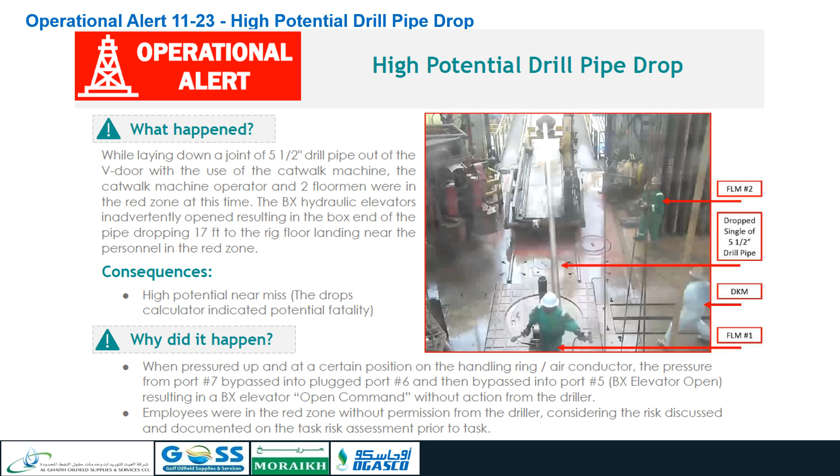Employees were in the red zone without permission from the driller, considering the risk discussed and documented on the task risk assessment prior to task. What should be done to prevent reoccurrence? Dedicated green zones must be clearly marked for employees to stand in while rig floor equipment is moving.

Red zone officer must be nominated daily on each crew to monitor personnel and stop them from entering the red zone without verbal confirmation from the driller. Personnel only allowed to enter the red zone after verbal confirmation from the driller or assistant driller, AD, and after

moving equipment stops. OIM/TPs shall instruct the expectations of employees on red zone, including the use of dedicated green areas, red zone officer, and only entering the red zone after verbal confirmation from driller or AD.

Areas where improvement is needed: workers must adhere to red zone standards and only enter the red zone when authorized to do so. Work supervisors must educate crews on red zone requirements and red zone officer, preventing any unauthorized access.

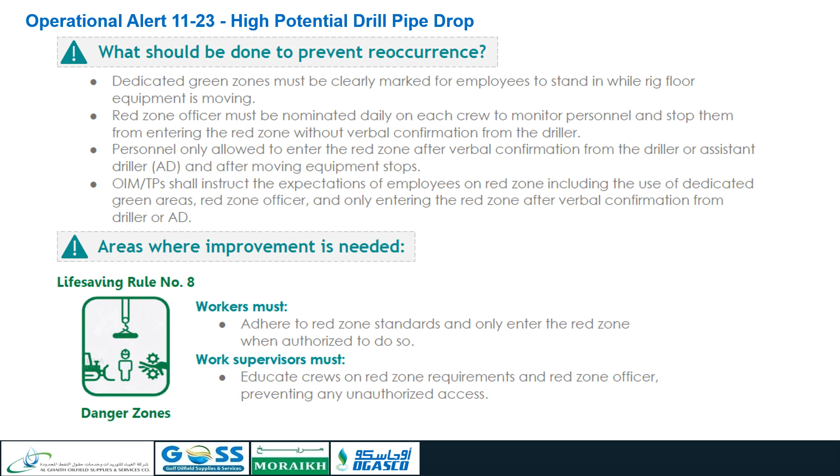Traveling block descended on Kelly during connection. Incident description: during run-in hole, RIH, with 6 drift BHA, while the crew picked up connecting the Kelly with drill string, suddenly, the traveling block descended about 2 feet and rested on the Kelly swivel. No damage and/or injuries reported due to this incident.

Initial findings: manual brake was not applied, not secured with chain, while torquing Kelly, and only the emergency brake was engaged. Air control valves for catheads activated and allowed the system pressure to lose, resulting in emergency brake failure. Simultaneous jobs were done on the rig floor without relevant work permit. No warning alarm system to alert the driller about low air pressure.

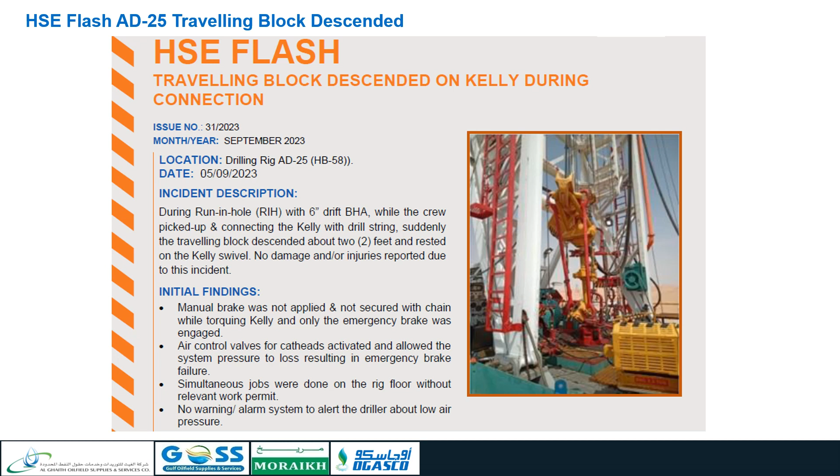Immediate actions recommendations: the activity was stopped and a safety stand-down was conducted with all staff at site to discuss this incident. It is recommended to: A. Always ensure manual brake is engaged and chained, instead of relying only on the emergency brake. B. Verify and ensure all the critical alarms are functioning properly. C. Conduct refresher awareness to the crew on the simultaneous operations.

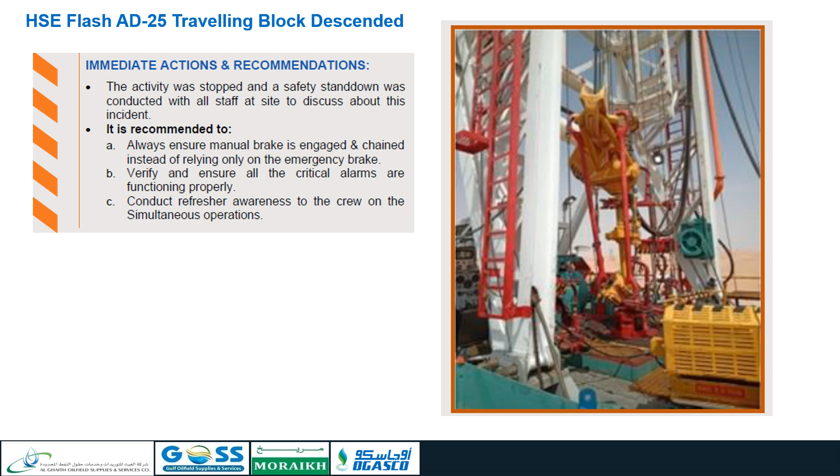High potential drill pipe drop. What happened? Description of event: after completing run-in hole, RIH, 3.5 completion tubing, 1 pup joint got damaged by the power tong. Decision was made to lay it down. The power tong operator, injured person, IP, subcontractor crew, parked the power tong offline and attempted to fix the stuck backup jaw while rig crew were laying down the damaged pup joint.

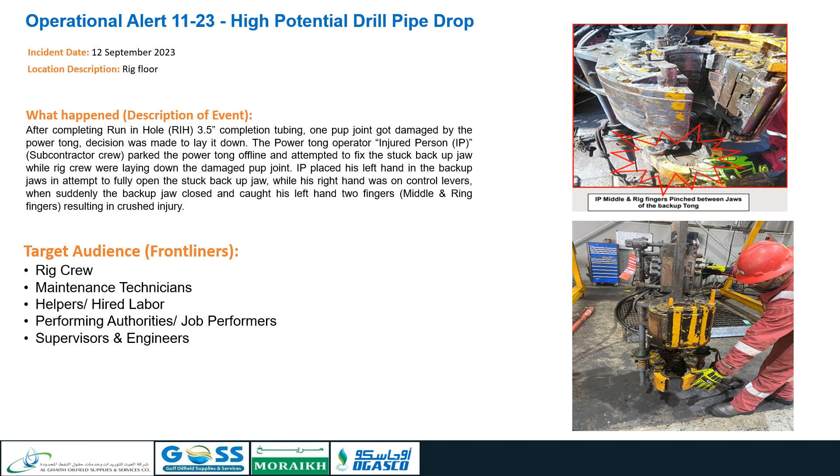IP placed his left hand in the backup jaws in attempt to fully open the stuck backup jaw, while his right hand was on control levers, when suddenly the backup jaw closed and caught his left hand 2 fingers, middle and ring fingers, resulting in crushed injury. Why has it happened?

Causes: the power tong was not isolated from the hydraulic energy before troubleshooting. No WMS was in place for changed scope for troubleshooting and repair of the power tong. JSA did not cover hazards and controls for tool malfunctioning. IP did not inform driller before doing troubleshooting job in the power tong. Power tong backup jaw malfunctioned and got stuck while running 3.5 completion tubing. IP did not inform or ask coworker for assistance.

Recommended actions: ensure that troubleshooting on the power tong, like change of dies, jaws, etc., should be done under energy isolation. Ensure that all the jobs including troubleshooting are carried out under WMS and JSA, with all relevant hazards and controls covered. Never initiate any task without permission or clearance from the area authority.

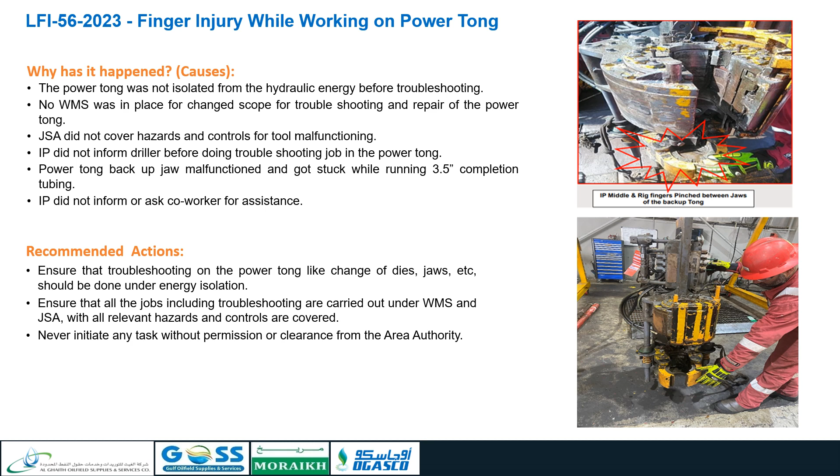Drop of CRT. What happened, description of event: while RIH 9 5/8 casing tubular, after running 112 joints and moving with the top drive system up to take the next joint, the casing running tool slipped/disconnected from the top drive system and fell down from a height of 35 feet, landing on top of the casing tubular joint box, causing damage to the casing tubular joint. No personal injury.

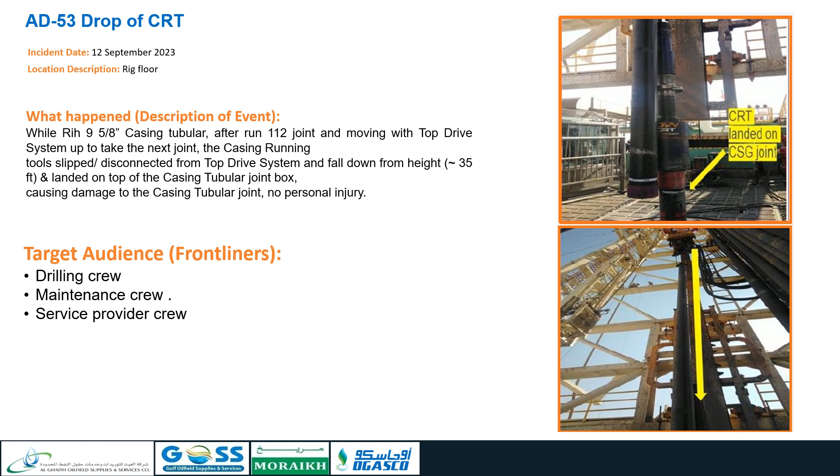Why has it happened? Causes: improper decision-making, lack of judgment, improper make-up torque between crossover and TDS saver sub. Defective tools, visual damage on the saver sub pin and crossover box. Inadequate development of PSP for the task. The minimum allowed torque of the connection was not mentioned in the task procedures.

Inadequate assessment of potential failure. The design of the CRT not having a mechanism or secondary retention to support in case of thread failure. Inadequate inspection, audit, monitoring: the saver sub or crossover was defective, and it was not inspected.

Recommended actions: always verify the connection between saver sub and crossover of the casing running tool during run-in-hole operation. Minimum torque for the CRT connection with TDS to be clearly identified in the job order as per the tool manual. Checklist for CRT installation to be utilized, including the visual inspection of the saver sub and crossover.

Discuss the required control measures as per job safety analysis, JSA, including the drop zone identification, in the toolbox talk prior to start of activities. Discuss the CRT installation and running procedures during pre-job meetings, with focus on potential risks and safety precautions.

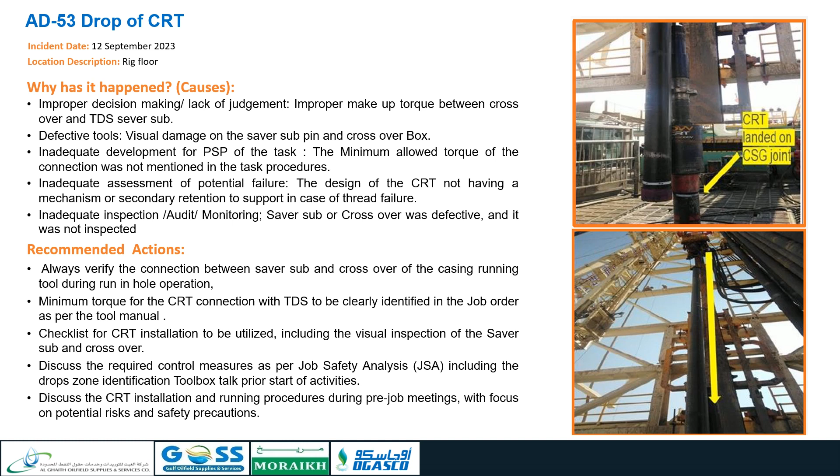Injury to cementing operator while cleaning the tank. What happened? After completion of the cement mixing job, the senior cement operator was cleaning the mixing tank for the next cement batch at night. The water hose was stuck, entangled, and while pulling the hose, the cement operator slipped, falling backwards, hitting his head on the edge of the mix tank flange, causing a cut injury on the head.

He was administered first aid at the rig site and sent to the ADNOC site clinic. From there he was referred to hospital. Why it happened? Slip and trip hazards. Housekeeping in the working area.

Use of water hose without the required jetting nozzle equipped with ball valve as per original equipment manufacturer recommendations. The water hose was stored near the operating panel with water accumulating around the cement unit, causing a slippery surface. The surge tank foundation connection plates contain sharp edges. The operator's hand slipped as he was pulling on the water hose.

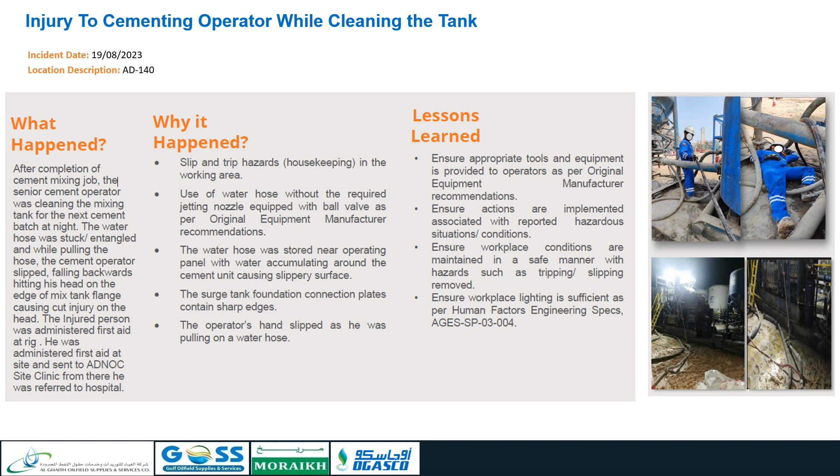Lessons learned. Ensure appropriate tools and equipment are provided to operators as per original equipment manufacturer recommendations. Ensure actions are implemented associated with reported hazardous situations/conditions. Ensure workplace conditions are maintained in a safe manner with hazards such as tripping/slipping removed. Ensure workplace lighting is sufficient as per human factors engineering specs.

Finger injury while breaking out BHA connection. What happened? Description of event. While breaking out a connection of the BHA, an assistant driller sustained injuries to his left thumb and index finger due to being caught in between the spinner chain of the hawk jaw and the tubular. The injured person, IP, was administered first aid at site and sent to ADNOC site clinic. From there he was referred to hospital for further treatment.

Immediate cause: lack of knowledge of hazards present. The injured person, a green hand, could not anticipate hazards due to the narrow gap between the horizontal handle and push button of the spinner chain. Improper decision making / lack of judgment. Unintentional dynamic risk was not assessed while breaking out the BHA assembly in suspended mode. Task continued without TOFS and risk assessment.

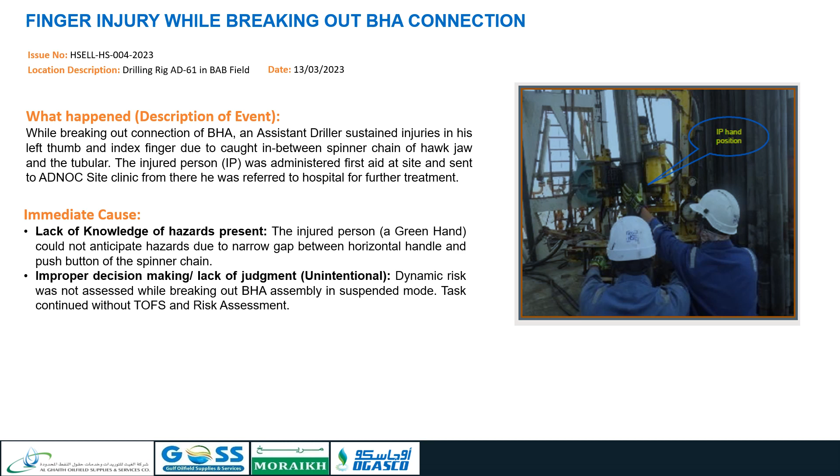Root causes: inadequate planning or risk assessment performed. There was no risk assessment performed when the POOH and lay down BHA operation was changed when the parted BHA, float sub, surfaced on the rig floor. Inadequate identification of worksite job hazards: the job safety analysis, JSA, did not address the risks associated with the tasks using the hawk jaw.

Inadequate leadership. Activities were conducted without ensuring availability of sufficient, competent resources for carrying out the task safely, including appropriate risk assessment. Lessons learned include dynamic risks: change in task in the JSA to identify all the hazards associated with the changed task and to provide appropriate risk control measures as required.

Ensure non-routine tasks for POOH and laydown are stopped and reassessed. Reinforce strict compliance to the standing instructions issued for effective green hands, hats, management. Ensure comprehensive training to the rig floor crew on safe use of the hawk jaw, including green hands, hats, and acting positions.

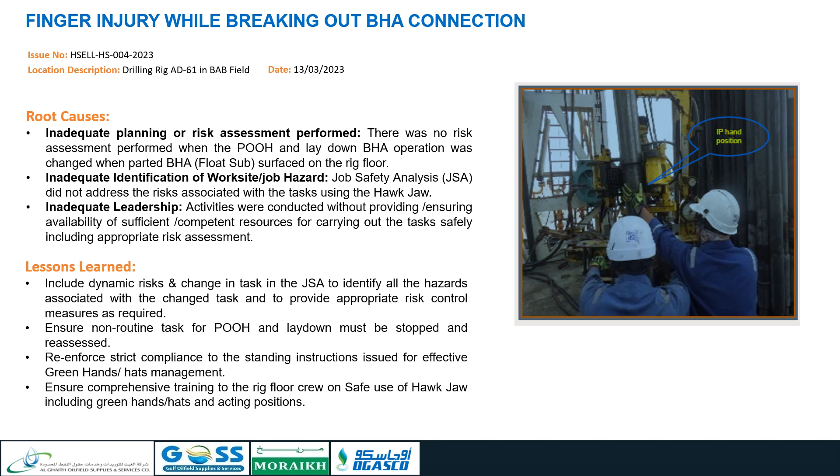Uncontrolled descending of top drive system. What happened? Description of event. During drilling 8.5 section using OBM with hole depth 9,156 feet, Shuaiba-D. After drill out stand number 89, driller washed up and started reaming down.

While attempting to engage drawworks brake with top drive approximately 30 feet above rotary table to set the slips, the driller noticed no response from brake system and traveling block was continuously descending. Finally, the top drive system, TDS, rested on the rotary table. No injuries reported due to this incident.

Immediate cause: defective equipment. There was massive wear of one of the brake bands of the drawwork. Step marks observed in equalizer beam hole and protrusion in eye-bolt adjusting nut. Scratch marks observed as well at EQ beam seat and on adjusting nut, leading to entanglement of brake handle.

Servicing of equipment in operation. Brake band bolts were loose, and nuts were not properly locked/trimmed. Grease fittings were not installed on brake band lower eye connected to cranks at the time of inspection.

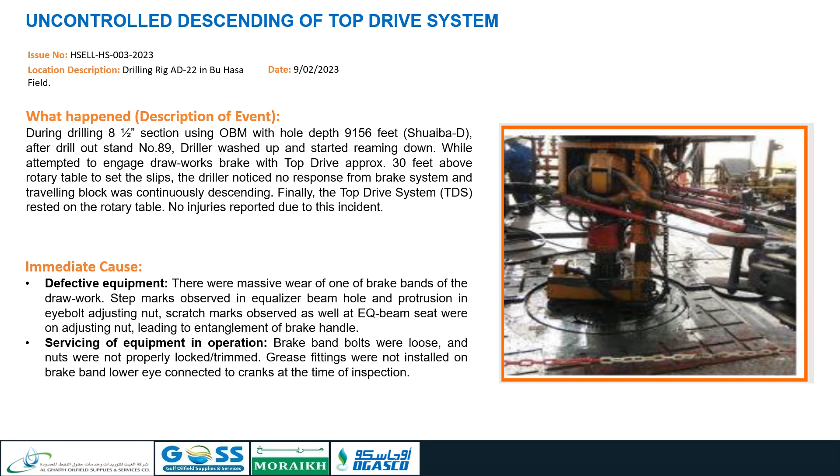Root causes: inadequate repair. Drum assembly was removed due to water leakage on DS brake for repair. During repair in drilling workshop and prior to removing drum assembly, the supporting pad eye was cut and re-welded again towards drum side, which led to improper brake band alignment. Inadequate implementation of PSP, PMS WOs for DW, mechanical, were closed without physical

verification/validation. Lessons learned. Ensure preventive maintenance tasks list for conventional drawwork include whole brake mechanism members integrity inspection, verify, validate brake system mechanism on conventional drawwork by cold eye. Recommended to carry out drawwork and TDS repair works under OEM supervision. Issue standing instruction to ensure that rig maintenance team is engaged while carrying out repair of drawwork and TDS at the workshop.

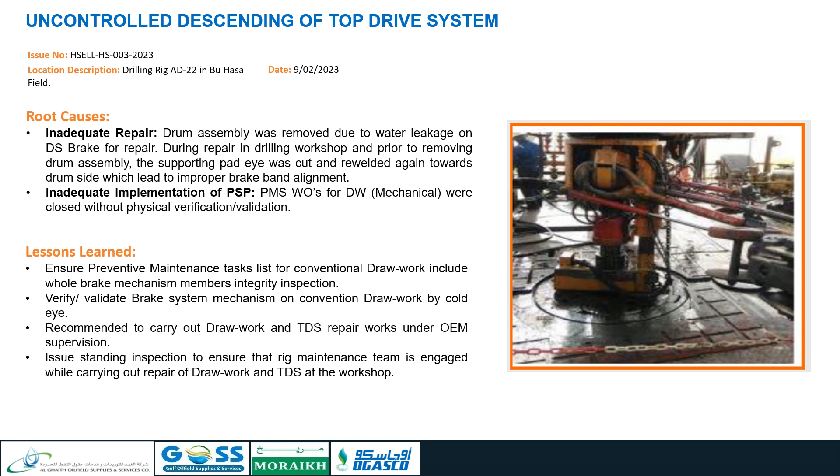TDS grabber drop, drill pipe guide. What happened? Description of event. While drilling of 26-inch surface hole, there was an abrupt drop of the top drive system, TDS, pipe guide grabber from a height of approximately 60 feet to the rig floor. No injuries to personnel were reported.

Initial findings. TDS grabber assembly bolts were worn out from inside, which compromised necessary grip for keeping the assembly tight to stationary assembly. Bolt lock wire was found in damaged state, which failed in keeping the bolt intact to the assembly. Secondary retention cable failed to hold the load of the stabbing guide. The rig had sustained harsh drilling and post-jarring on the previous well and no detailed inspection as per OEM recommendation was undertaken.

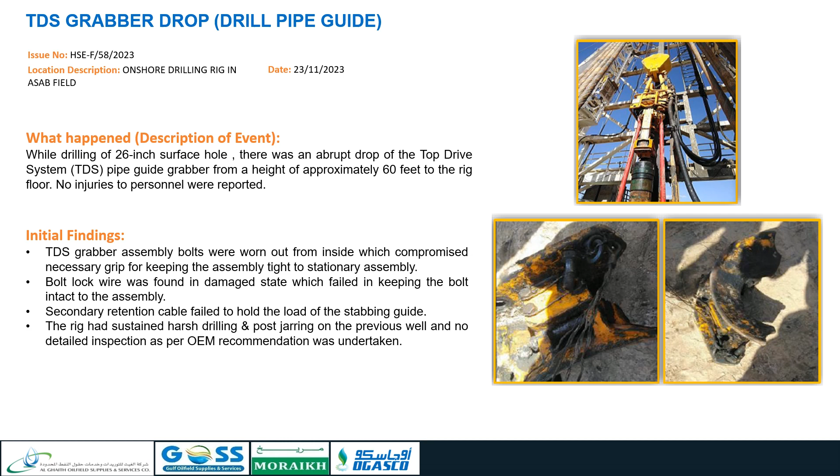Immediate action recommendation. All the activities were stopped and safety stand-down was conducted at site. It is recommended to conduct a comprehensive inspection on grabber guide bolt lock wire mechanism for wear and tear and replace effectively across rig fleet.

Post-harsh drilling jarring operation, a detailed inspection as per OEM recommendation shall be undertaken with photographic evidence. There should be effective OEM recommended maintenance of the equipment and auxiliaries substantiated with photographic evidence.

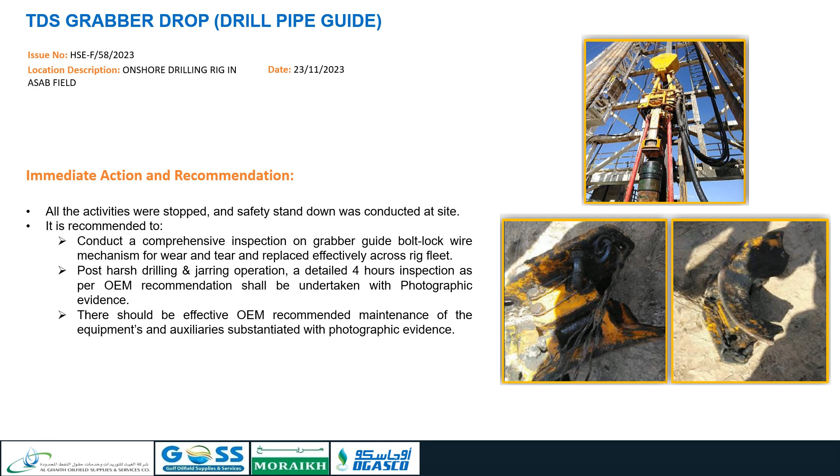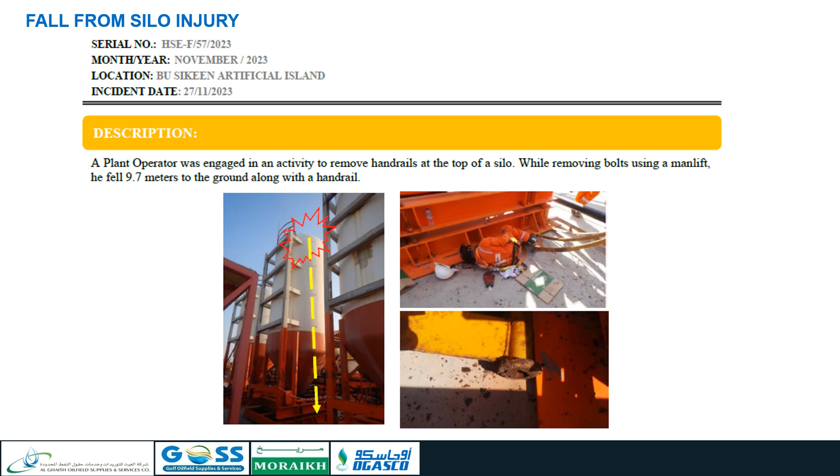Fall from silo injury. A plant operator was engaged in an activity to remove handrails at the top of a silo. While removing bolts using a manlift, he fell 9.7 meters to the ground along with a handrail. Initial findings. The injured person was wearing a double lanyard safety harness. A severely corroded handrail detached from its base. The double lanyard was hooked to a severely corroded handrail, which detached and dropped.

Non-compliance with work management system requirements: i.e. PTW & JSA. No planned inspection and maintenance for the corroded handrails and fixed ladders.

Immediate actions recommendations. An immediate ban was enforced on climbing up or working on top of silos and bulk tanks until further notice. Immediate safety stand-down shall be conducted across the fleets to discuss the incident and immediate corrective actions. Carry out condition assessment on all handrails. Protective devices which are not normally used.

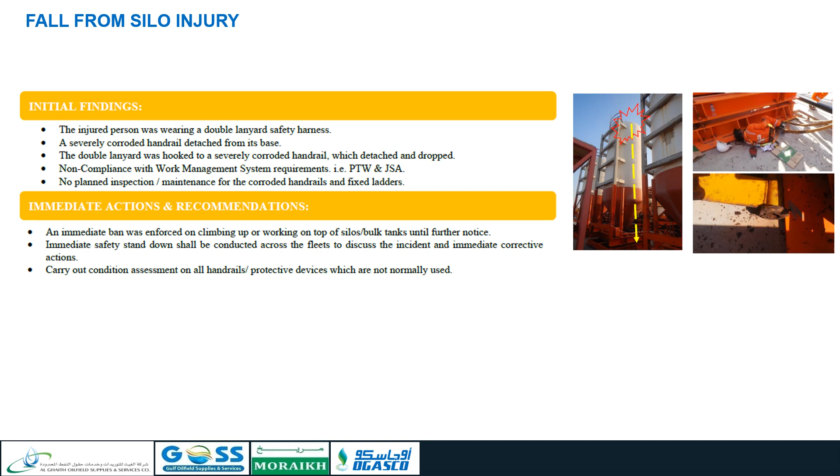When you give safety a little time, it will give you a lifetime. Let us all work safely and return home safely to our family.